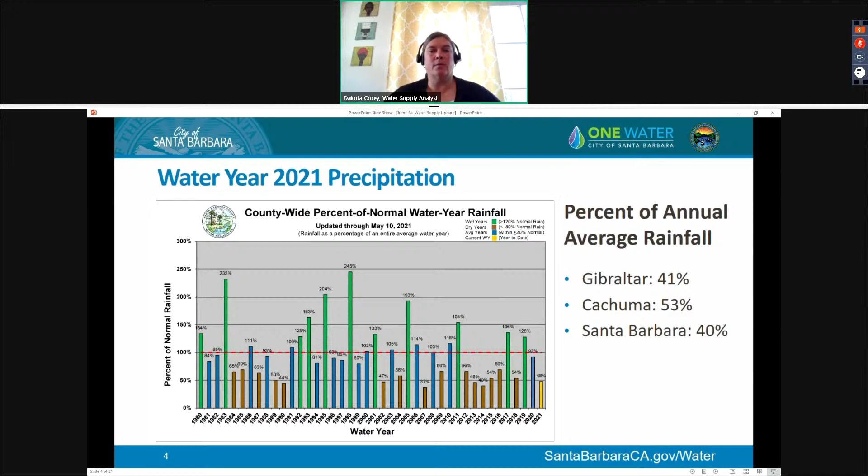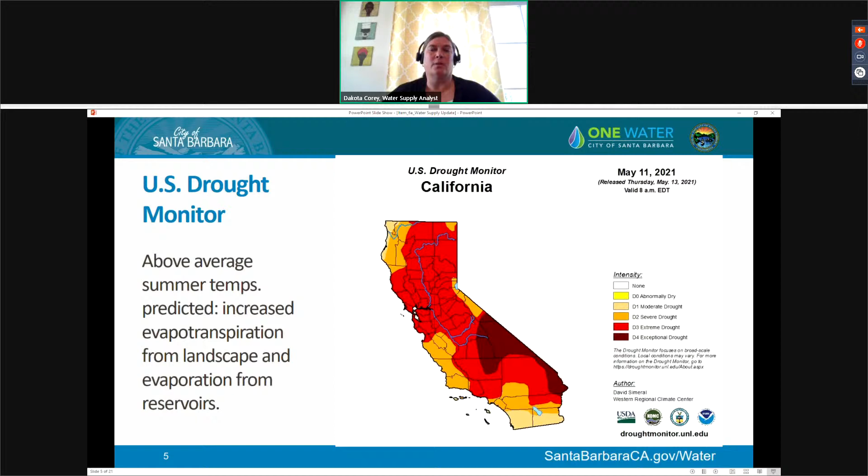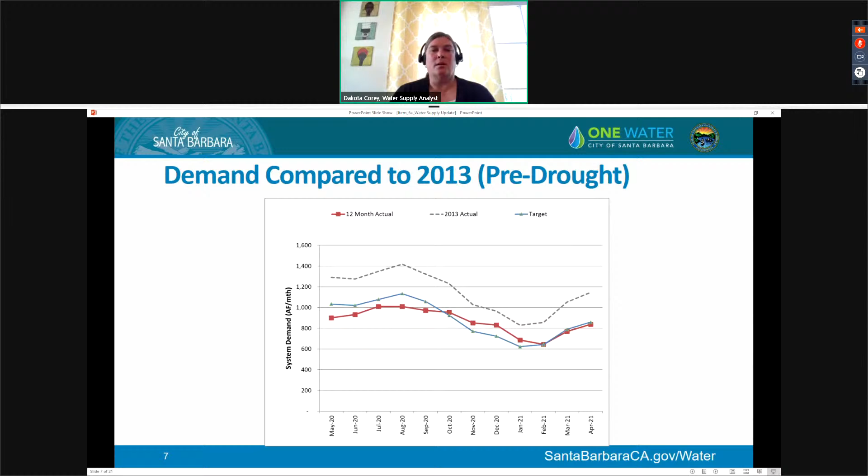So let's look at demand in the city. This is another graph that you've seen in the past, but just to orient ourselves, we look at 2013 actual data, that's the gray dashed line. You'll remember that we used 2013 as a benchmark, defined by the state as pre-drought conditions. On this graph, the blue line represents our target water demand, and the red line represents actual water demands. In this graph, we were expecting to see 20% less than 2013 actual demands. You can see the red line and the blue line are really tracking quite closely, so our community is on track with the demands we've projected through the water year.

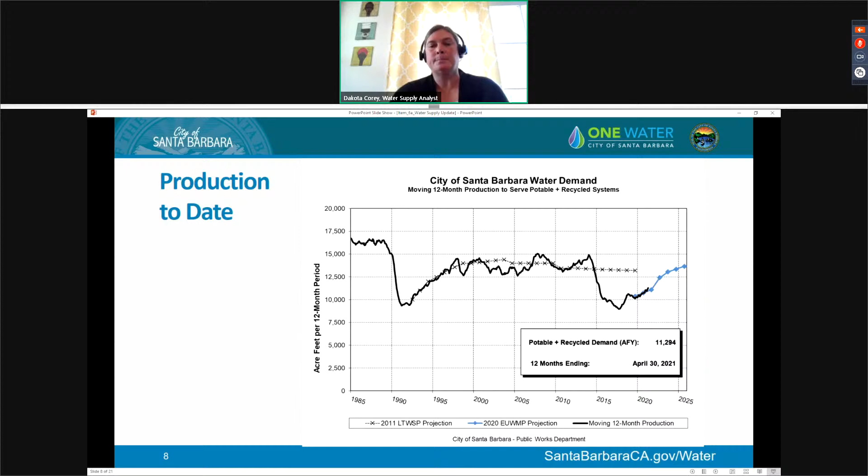Now let's look at each of our individual water supplies. We'll start with Gibraltar Reservoir, a reservoir on the Santa Ynez River that's owned and operated by the city. Currently, Gibraltar is basically empty. It has 554 acre feet of water stored, or about 12% of its capacity. We really saw negligible inflows into Gibraltar this year because we had so little rainfall, but we were able to utilize the water that had been stored in Gibraltar from the last rainy season. It last spilled in March 2020. For water year 21, we've actually been able to divert over 1,200 acre feet for use at the city, and that's been an important supply source. We'll see how that all comes together with our other supplies a little bit later in the presentation, but the short story is that using water in Gibraltar has allowed us to store more water in Lake Cachuma.

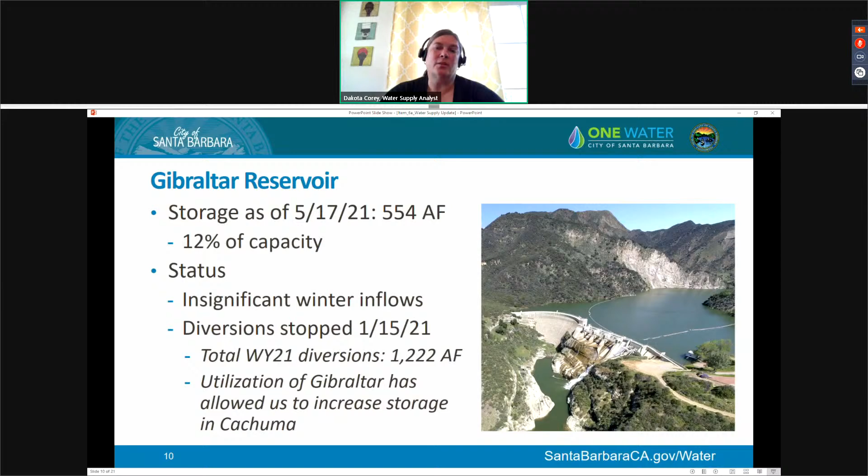Cachuma Reservoir is another large supply source of surface water for the city. It's a shared resource, so the city is one of several agencies that keep water stored in Lake Cachuma. Current capacity of Cachuma is about 60%, or a little over 114,000 acre feet. Of that water stored in Lake Cachuma, the city's stored supply is just under 25,000 acre feet, representing about 2.5 years of total demand for the city. I have a breakdown on the slide of how much is our current water year allocation.

Over 16,000 acre feet is carried over from previous years, and this is where management of our various water supplies gets really important. As we utilize other supplies available to us, we build up this carryover water in Lake Cachuma, which can be a really important resource and buffer as we head into dry years like now. Side note, the member units or other water agencies with water stored in Lake Cachuma will be requesting their water year 22 allocation by July 1st, so we'll probably have an update in the next couple of months.

Another source available to the city is the State Water Project. You've probably heard quite a bit about this source in the news. Across the state, water availability is really limited, and for this year the allocation on the State Water Project is only 5%. That ties with 2014 for the lowest ever State Water Project allocation. What that means for the city is our Table A amount, our potential to receive water from the State Water Project, is 3,300 acre feet of water. 5% of that is 165 acre feet. So we have very little water available to us from the State Water Project.

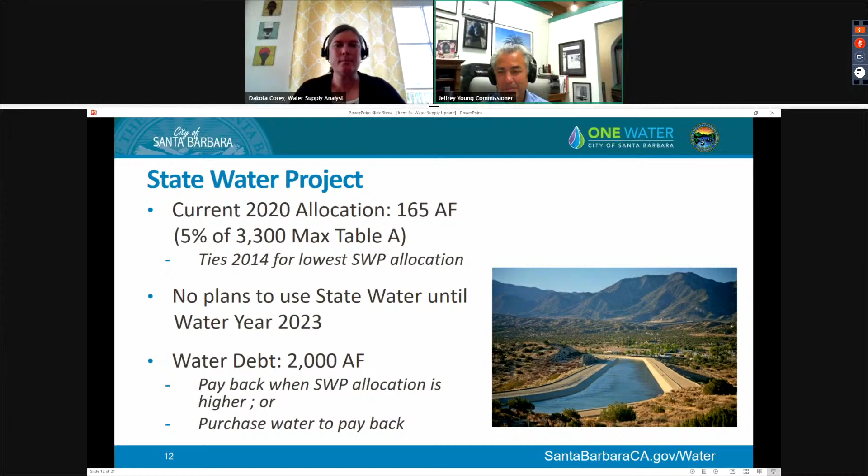Okay, so we can probably skip up to the groundwater slide. Thank you. So as you'll probably recall,

we utilized our groundwater resources quite a bit in the last drought. That's typically a drought supply for us. So we keep water in storage during wet years, and then we call on it during dry years when our surface water supplies are diminished.

Currently our groundwater basins look somewhat similar to what they did coming out of the last drought in the late 80s, early 90s. And since 2017, we have been resting our groundwater wells and basins to allow them to naturally recharge. We expect full recovery of the basins to take 5 to 10 years.

I did look at the graphs recently to see where we're at. In terms of storage in the Foothill Basin, we are seeing an upward trend of storage. And in terms of seawater intrusion in storage unit 1, we're seeing a downward trend of chlorides in the water. So we are seeing the groundwater basins recover in a positive direction. It's just going to take several years to fully get there.

I will mention that in the monthly Water Resources Managers Report, which is part of the Water Commission packet, those groundwater basin charts are included this time around, so you can see those.

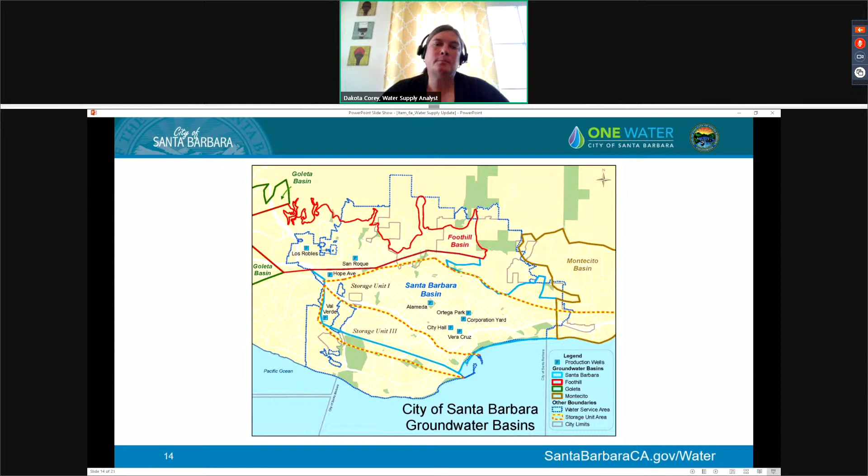Desalination is another important resource within the city's water supply portfolio. It's a critical part of our water supply, and it's played an extremely important role in drought recovery as we've been coming out of the last drought. And now as we're looking at potentially going into drought conditions in the future, it's allowing us to store more water in Lake Cachuma as we produce desalinated water and use it, which helps us with preparation for any future droughts. Next slide, please.

And finally, recycled water is another important supply that we have available to us. The recycled water plant has been operating and meeting customer demands. I anticipate that we'll have probably fairly high demands on that system this summer if we do have the higher temperatures that are being predicted. And fortunately, the plant is ready to go to meet those needs.

Recycled water plays a really important role because it allows us to offset what would be potable water used for irrigation with recycled water instead. And as part of the enhanced urban water management plan, we'll be kicking off an updated market assessment and cost benefit analysis, looking at opportunities to connect potentially new customers to the recycled water system this fall. So we'll be coming back with that to you later in the year. Next slide, please.

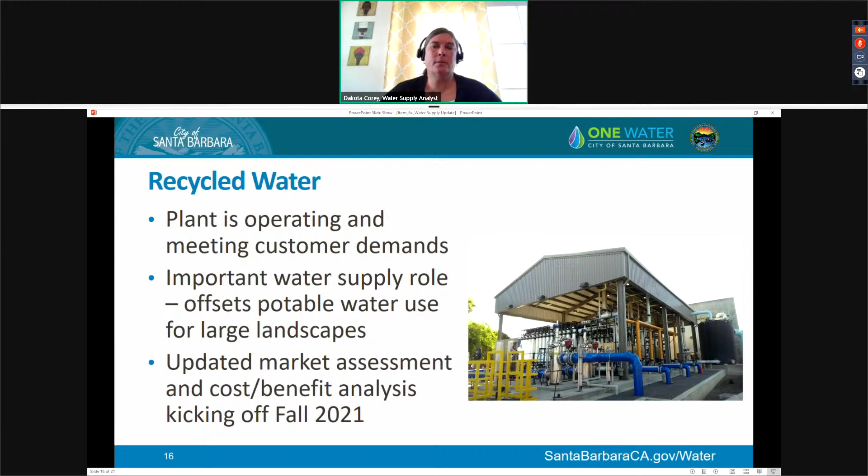Okay, so now we'll take a look at our water supply strategy. We can move on to the next slide. This is really where we put those demand slides that we looked at previously, and then our water supply slide together, and we look at the big picture.

So basically, we assume that we have dry years like we have had this winter, and that those dry years continue three years into the future.

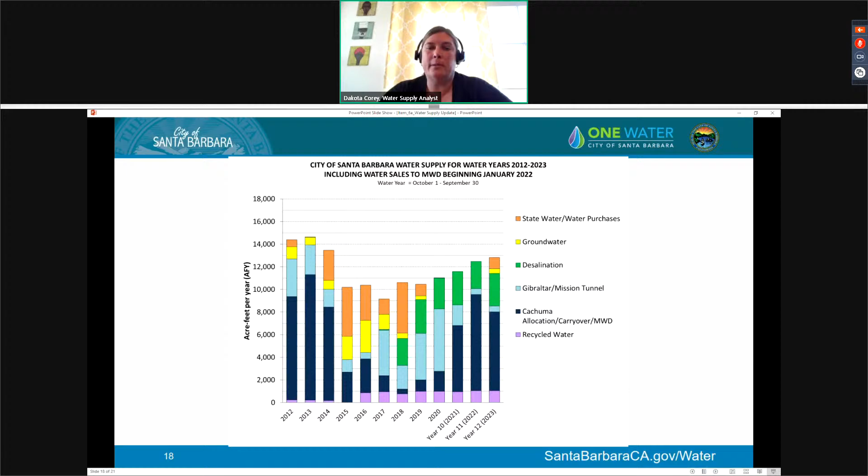So the big picture story here is that we have plenty of water to meet needs, even in dry conditions, out to the future. And that's really a result of prudent planning and our diverse water supply portfolio.

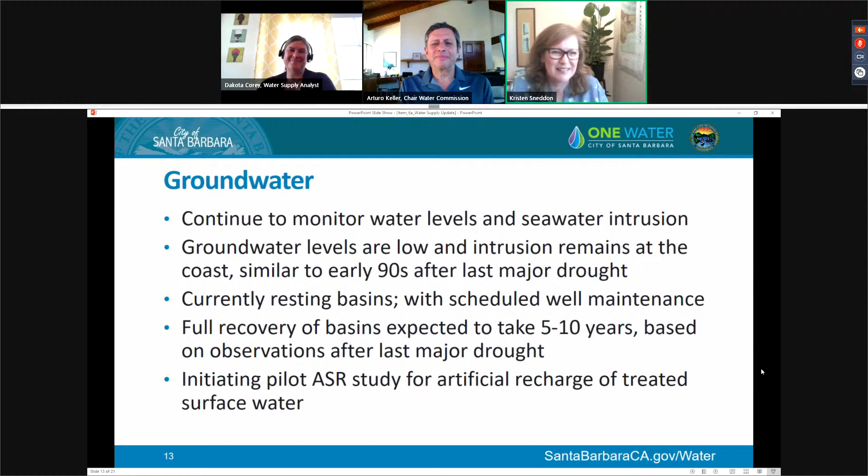So I love the new groundwater basin map. I think I've used that one in teaching too, so this new one is very very nice. Appreciate that one. And when we're talking about the groundwater injection, I'm glad we'll have a presentation on that.

A more full presentation. I can hear Edo McGowan's voice in my head coming to public comment and talking about the issues with groundwater injection. So it would be good for the public to understand that everything's being considered, and what's being considered.

And I just want to say, whenever we have this presentation, you make it so clear about how diversified our water portfolio is and how complicated with the exchanges - some of those exchanges are paper exchanges and some, you referenced, an in-lieu exchange - there's so much going on with all of these interactions. And then mentioning that it's cheaper to buy it in the wet year versus the dry year, I'm just so grateful for your work.

But then also I was just thinking about that we have this whole water commission that also is sort of checking everything and representing constituents and people and ratepayers. And then on top of that, this enhanced urban water management plan that reached out to the whole community.

I'm just, to see it all come together in this way with your planning, and we're right where we predicted. And even though we hear things in the news about drought and emergency, it's really gratifying every time you give this presentation to see how things play out. I just wanted to say thank you.

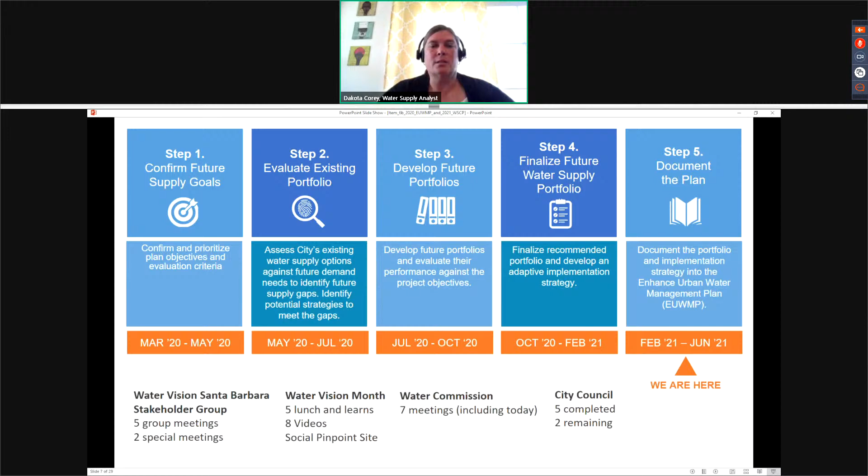Okay, so let's talk about urban water management plans. As I mentioned earlier, it's a state mandated plan that needs to be submitted to the California Department of Water Resources every 5 years, and there are specific analyses required to be within those plans.

One thing we must provide are water supply and demand projections with a 20-year planning horizon. Because our Enhanced Urban Water Management Plan is enhanced, or bigger than a typical urban water management plan, we actually went out 30 years in this planning process.

We also need to report on our water conservation targets. There was a Senate bill, SB X7-7, that required water agencies to reduce their water use by 20% by 2020. Now that we're preparing our 2020 urban water management plan, we're going to report on how we did in comparison to those targets. The good news is that we far exceeded them, and we'll talk about that in a little bit.

We're also going to be looking at our water supply in both normal and drought conditions, similar to what we talked about in the water supply update, but there are specific requirements for urban water management plans that I'll explain in a little while. This plan also includes a 5-year drought risk assessment, which is a new requirement, and finally the water shortage contingency plan, which outlines our different drought stages and the actions we can take to reduce demand if we have a water supply shortage.

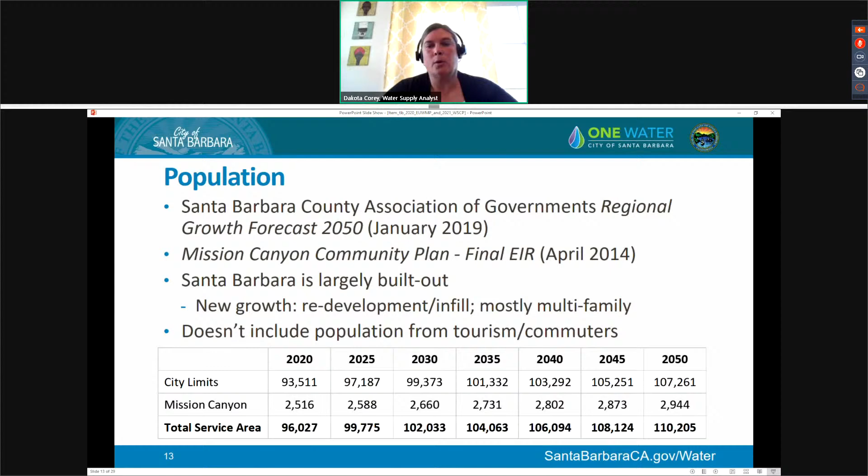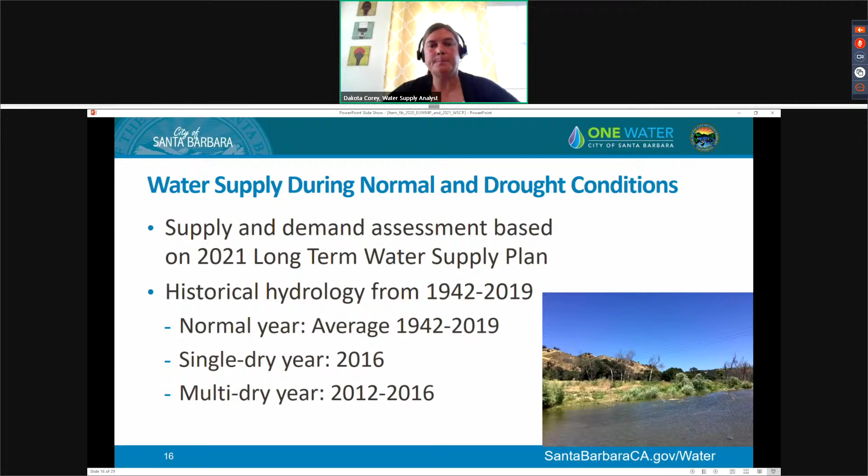Results of that assessment show what we've seen with our larger Enhanced Urban Water Management Plan analysis. In normal years, the city has sufficient supplies available, and we typically have excess supplies that we can store for future dry years. That's our carryover water in Cachuma.

That's letting our groundwater basins rest when we don't need them during normal years so that we can call upon them later. In a single dry year, because we have such a diverse water supply portfolio, we don't usually run into problems at all with supply and demand if we just see one dry year. We can easily meet those needs with carryover water stored in Cachuma, groundwater, and our various water supplies.

As we know from the work we've been doing on the Enhanced Urban Water Management Plan, it's really multiple dry years or consecutive extended drought where we start to see supply shortages at the city. In the multiple dry year analysis as defined in the Urban Water Management Plan, the results show that in year 5 of 5 dry years, we would see a water supply shortage of 20%, meaning that's when we would want to ask our customers to reduce demand through different water supply actions by 20% so that we can make sure we meet that demand.

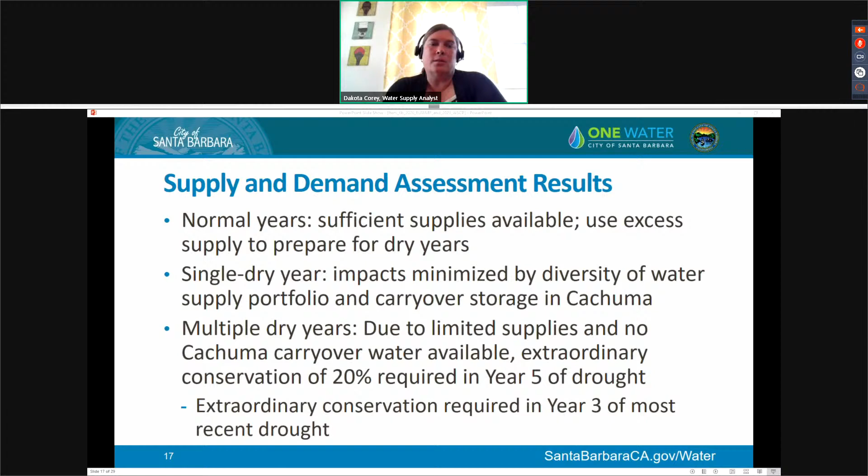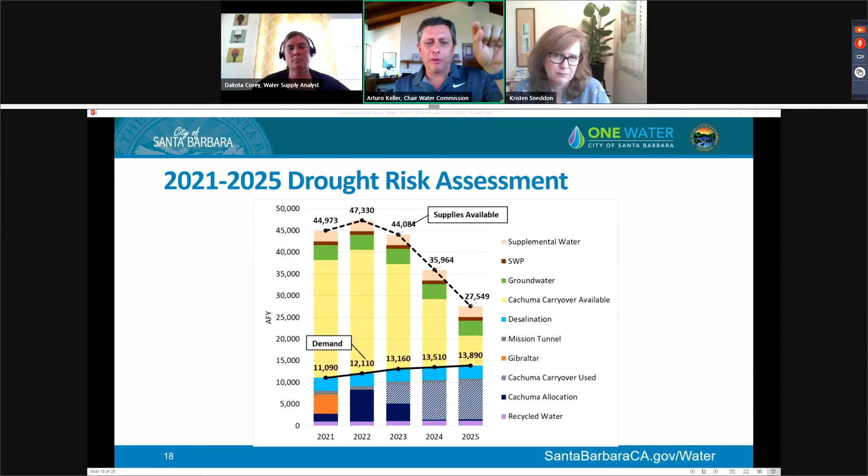Okay, let me give it a stab. I want to make sure I'm understanding your question correctly—if I may just try to clarify it a little. If we went ahead with 2 more years of drought, and the supplies available dipped below our demand, that's where things would get really complicated, right?

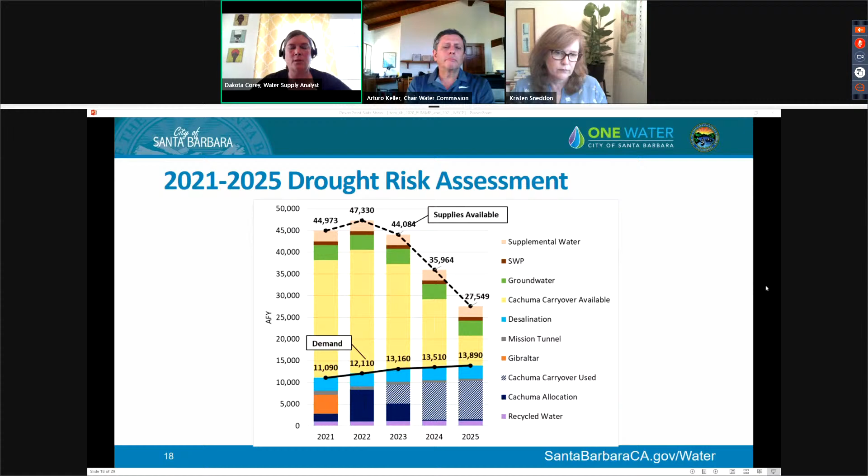So if we can skip ahead to that table, please, that has the 4 different drought shortages—maybe we need to edit that link. Is this one here? I'm thinking you're looking at these descriptions under water supply condition, and it talks about being linked to Cachuma entitlement, and that there's no other shortages, but it's not linked to the state water project—it's more specific to local conditions.

Okay, yeah, there you are. Thank you for that clarification, because we went through this slide and I somehow thought it was linked to our allocation from state water. Then you said how we're lessening our dependence on state water, diversifying the portfolio, so I wasn't making the connection. Thank you, that's really, really helpful.

And for comments, I agree with Commissioner Davis about emphasizing that 4th recommendation. I don't think it's really well understood by our ratepayers, or by our county representatives, how reliant we are, how all those moving pieces come together—and if you just pull one thread, the base of all of that is out of balance. I think this presentation describes it so well.

And part of that too, as I said before, with the enhanced urban water management plan, the process you went through—which I always say at council is the process to use—what you all did for this plan with the brown bag lunches and meeting with all the different stakeholders, with really a focus on equity, I can't emphasize enough how much I applaud that. It's not just the people who come and have the time in their day to come and make a lot of comments.

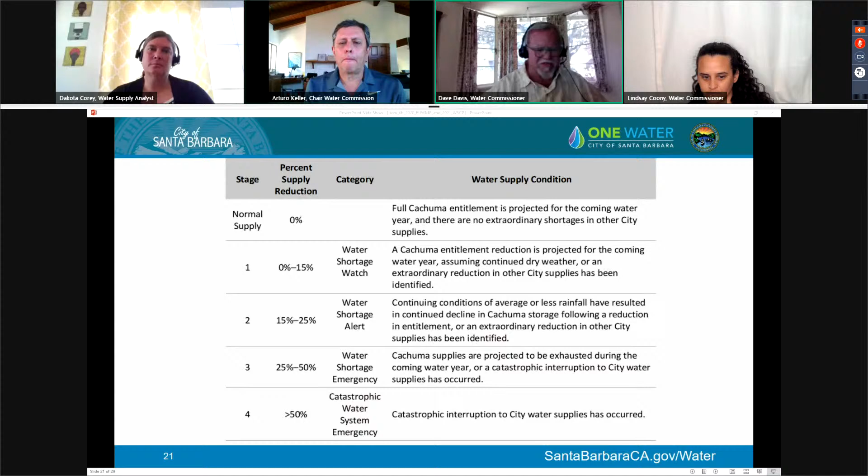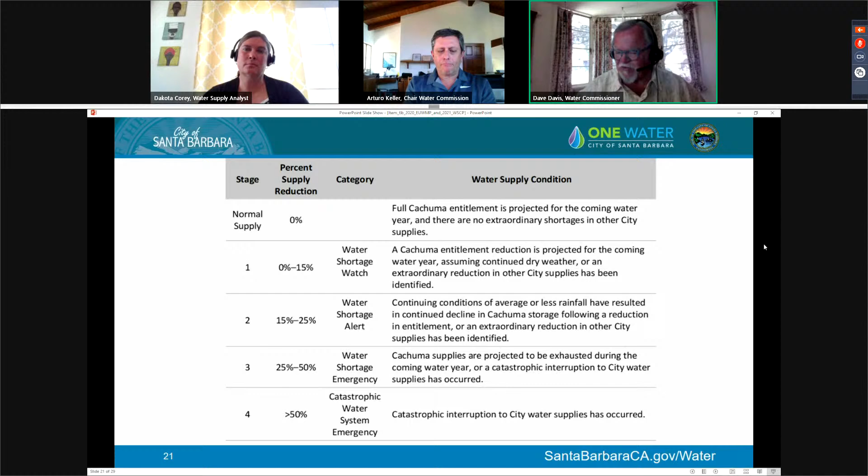Commissioner Davis: I did leave out one thing, mainly because I lost this battle in our last discussion. This is on the long-term water supply plan, page ES3, regarding the suggested water reserve thresholds for converting desal to standby. I had a good discussion with staff and consultants last time about the 180,000 acre feet, the third bullet there, and we discussed splitting the difference between 120 and 180.

My real comment is on this one point - the other two I feel strongly about, but this is a suggestion. As with our 2011 long-term water supply plan, by 2015 that was out the door because we were dealing with reality and adaptive management, and had to make changes. Under real conditions, I think the water supply manager will make the right calls, but to nudge them, I'd still like to see that be the mid-range at 150 rather than 180. Other than that, I'd be willing to make a motion when we're ready.

Okay, do we have any other questions or comments? No. Will we have a motion at this point? If we had no public comment, I will go to a motion.

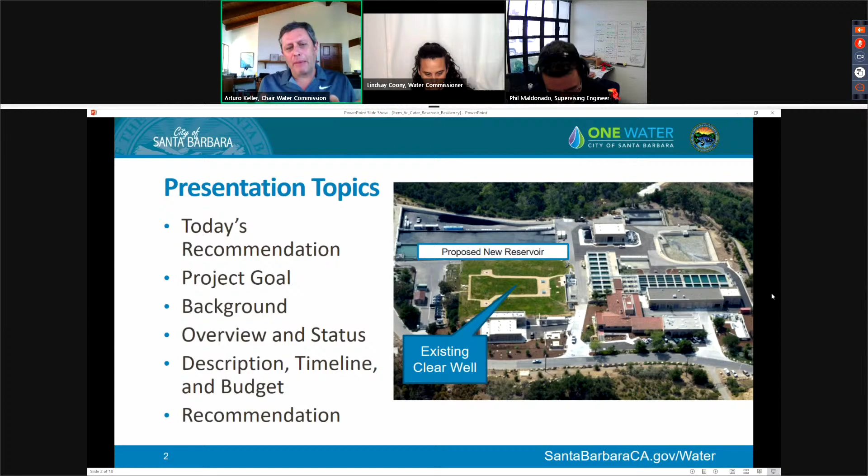So now we have Mr. Maldonado giving us the information on the contract for the design of the Cater finished water reservoir. Mr. Maldonado, you're a little bit under pressure. We do have some time constraints, but we don't want to rush too much, so please be as brief, but complete. Thank you, absolutely. Chair Keller, Commission members, Council Member Sneddon, good morning.

I will be as adaptable as I can be and move through this presentation. I am a supervising engineer with the city and manager for this project. I am here to present on the Cater Finished Water Reservoir Resiliency Project.

Next slide, please. Why are we presenting today? Staff is recommending authorization of a contract for design for this project. We're asking for Water Commission support of this action prior to taking this recommendation to council. We will provide background for the project along with an overview of the current status, description, timeline, budget, and the intended goals of this work.

Now, in the broadest terms, the goal of this project is to increase the overall resiliency of the city's water treatment system. This will be achieved by adding a new chlorine contact time reservoir to the treatment process.

The photo you see here is an aerial view of our Cater water treatment plant. In the center is a green field. This field covers the roof of our existing clear well, where the required chlorine contact time for disinfection is currently achieved as part of the treatment process before water is distributed to the city along with our regional partners, Montecito and Carpinteria.

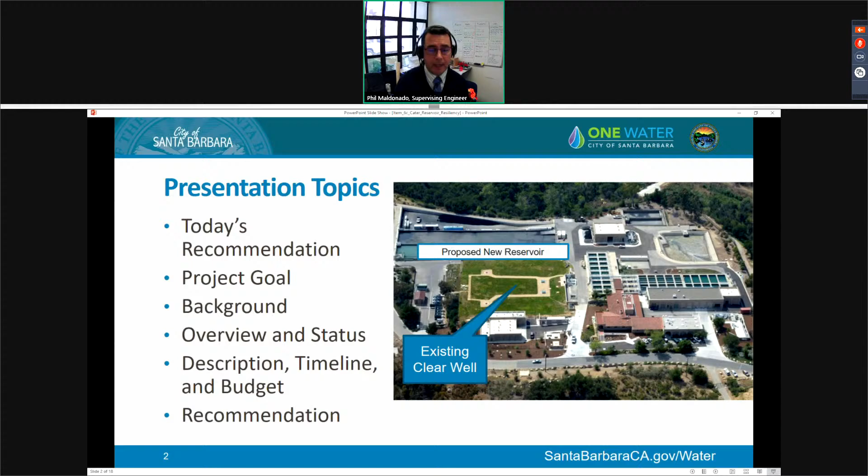For the design phase to move forward, staff recommends awarding a contract for design to Carollo Engineers in support of this project. Carollo was selected through a competitive request for proposals process. They were designated as the most qualified to deliver the project's design from a total of 3 firms who submitted proposals. As described in their proposal, Carollo has completed over 65 projects throughout Santa Barbara County, including multiple projects for the city of Santa Barbara.

Through their work, Carollo has developed extensive knowledge of our city. Specific to this site, they designed the advanced treatment project at Cater and have recently completed 3 of the 4 evaluations used to support this project scope. Next slide, please.

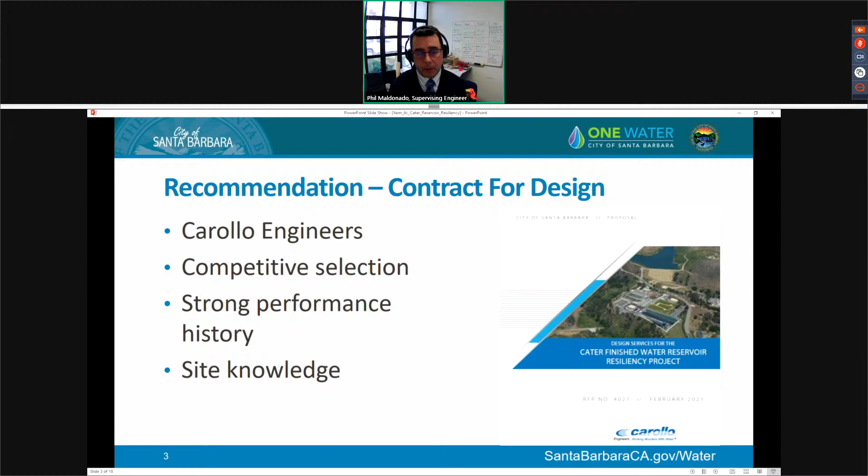As initially mentioned, the primary goal of this work is increased resiliency. But how is resiliency defined for this project? Resiliency will be achieved in multiple ways.

First is by increasing the amount of water storage available at the treatment plant. This additional storage will allow for greater operational flexibility by allowing the existing clear well to be bypassed for extended periods of time. The design scope includes the addition of an approximate 2.5 million gallon reservoir.

Second is by extending the time available for chlorine contact to occur in the treated water. The normal operating state of the new reservoir will be to provide the needed chlorine contact time required for disinfection compliance. This will leave the full capacity of the existing clear well as a treatment buffer if there is ever a need.

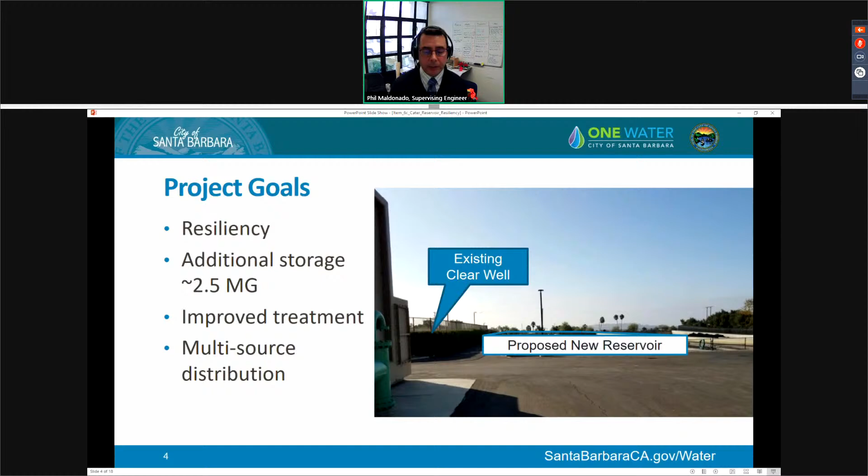Finally, piping modifications will allow blending additional city supply sources like desalinated water conveyed through the distribution system. Combining these sources at Cater expands the reach of these additional sources throughout the city and the region, maintaining the treatment plant as the distribution hub for the city and our regional partners. Next slide, please.

In the next few slides, we will review the project background. This will include the existing clear well and how it functions in the system. Please note, the image on this slide depicts the existing clear well and the basic elements of its configuration.

We will also review the assessments that have been conducted, the needs these assessments were developed to address, and the recommendations provided, an expanded description of the benefits that will be realized by adding storage capacity, and how the proposed design will be centered on maintaining regulatory compliance. Next slide, please.

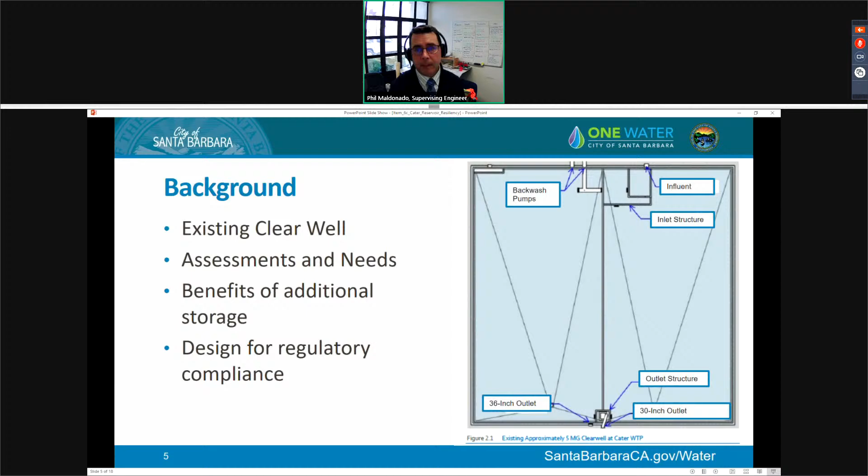Constructed in 1962, the existing clear well has an operating storage volume of approximately 5 million gallons. The existing clear well sufficiently achieves all regulatory measures required of the treatment process. With that said, there are operational limitations that impact the long-term viability of this facility if not addressed.

First, with only one reservoir, there are limited operational scenarios that allow for the needed periodic cleaning and inspection of the reservoir. This constraint also greatly limits the ability to replace or repair equipment internal to the reservoir. As this reservoir ages, the need for increased maintenance becomes greater.

This design will ensure complete treatment for all flow conditions through the new reservoir. The design will also include an in-depth seismic and structural assessment of the existing clear well that will inform staff on any current deficiencies that may impact the long-term needs of the facility.

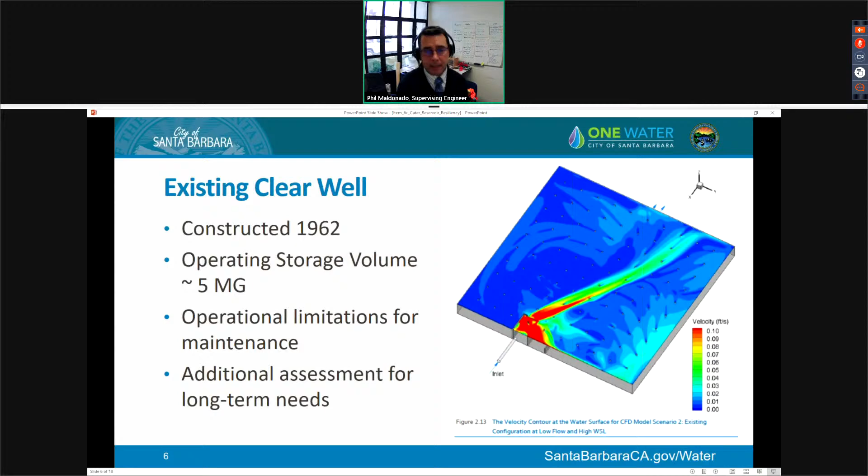The city conducted 4 separate assessments to develop this scope of work. First, the Cater Yard Piping Modifications Technical Memorandum was completed in October 2018. This technical memo analyzed piping modifications and routing options to blend additional city water supply sources conveyed to Cater. These modifications will improve overall supply resiliency by expanding the reach of these additional sources throughout the city and the region.

Second, the Cater Clearwell Structural Analysis Technical Memo was completed in January 2019. This memo assessed the structural capacity of the existing clear well to accept modifications to the interior that would benefit the treatment process. Third, the Cater Clearwell Chlorine Contact Time Evaluation Technical Memo, completed in February 2019, evaluated the requirements of the existing clear well to achieve disinfection permit compliance. And finally, the Cater Chlorine Contact Basin Feasibility Study Technical Memo, completed in June 2020, analyzed the feasibility of 4 possible locations for a new reservoir at the Cater Water Treatment Plant.

Completing these assessments enabled city staff to develop the recommended scope of work for this project.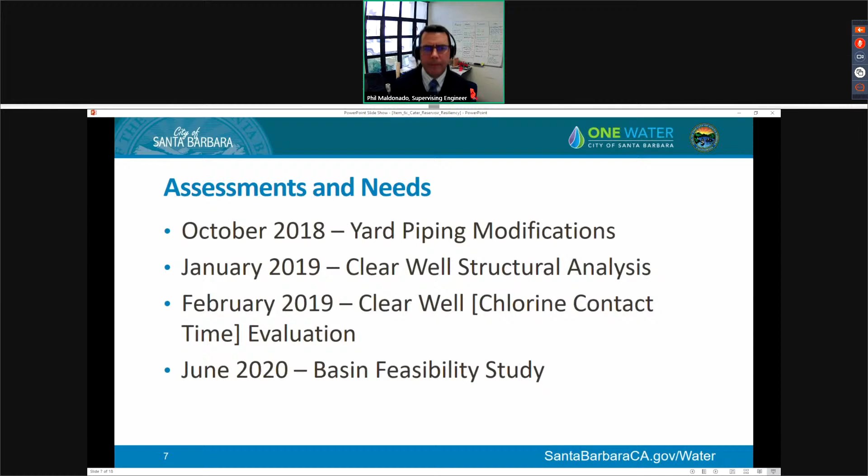Additionally, the risk of operating at this diminished capacity limits how long access to one side of the reservoir is available. For the majority of the year, the entire reservoir must remain in service, and this limited access represents a significant liability if a situation emerged that required immediate response.

The new reservoir will allow for bypassing the existing clear well for the full range of flows through Cater. This will allow for complete access to the existing clear well for an extended period of time if needed, both for periodic maintenance or more extensive repairs as they are identified.

The new reservoir will be designed to achieve the required chlorine contact time for the full range of flows. It should be noted that a properly designed reservoir can accomplish this in approximately half the volume of the existing clear well. The ability to bypass and maintain complete treatment through the new reservoir will expand the range of operating conditions available to staff. This expanded operational capability greatly increases the long-term resiliency of the existing clear well, as well as the overall distribution system for the city and our regional partners.

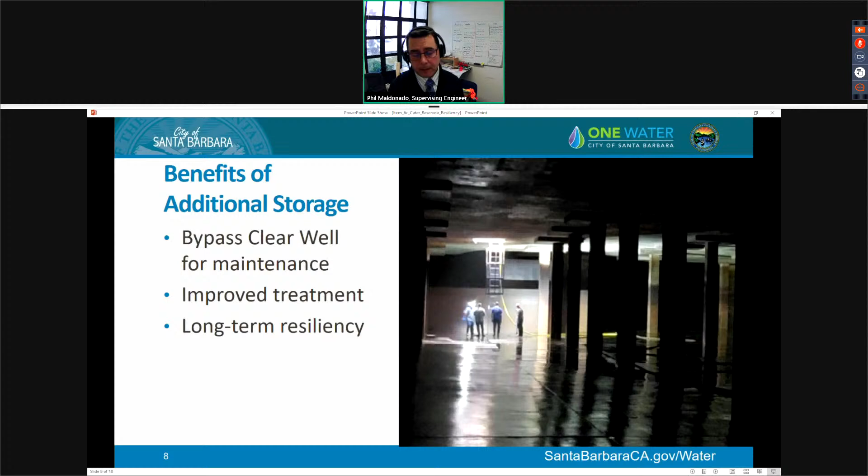This slide shows another view from the interior of the existing clear well. As shown in this photo, the size of the interior equipment requires additional time to both maintain and replace as needed. The proper functioning of this equipment is key to the treatment that this facility provides for regulatory compliance.

As well as the ability to store and move water where it is needed throughout the city and into the South Coast conduit for our regional partners. The proposed new reservoir is intended to fully address all regulatory compliance needs of the treatment process.

These include operational flexibility that will allow both reservoirs to be maintained independently, supporting system resiliency for the life of both assets. The new reservoir will include elements that allow it to treat water for regulatory disinfection compliance using half the volume of the existing reservoir. The improved hydraulics of the new reservoir will optimize treatment to ensure required chlorine contact time is achieved. With the new reservoir in place, the existing clear well can be assessed in greater detail and more extensive maintenance can be performed in the future.

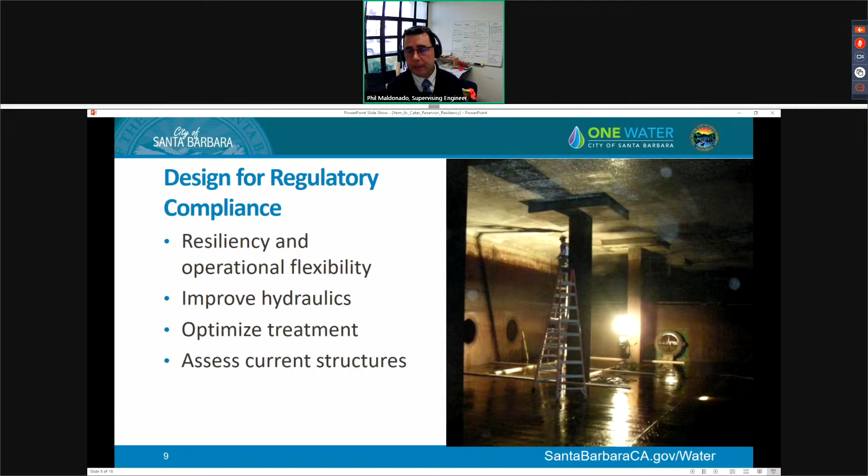As mentioned previously, the scope of work was developed using multiple assessments and drawing from the operational knowledge and experience of current staff. The primary scope objective is to construct a new reservoir adjacent to the existing clear well, allowing the existing clear well to be used for storage and supply balancing. Adding this new infrastructure will require connective piping and modifications to the inlet and outlet structures of the existing clear well. Carollo's proposal included an effective design approach centered on industry-leading modeling and analysis tools, combined with an extended history of implementing similar projects, making Carollo the best firm for this work. Staff are ready to proceed with the design effort, building upon the preliminary work already completed.

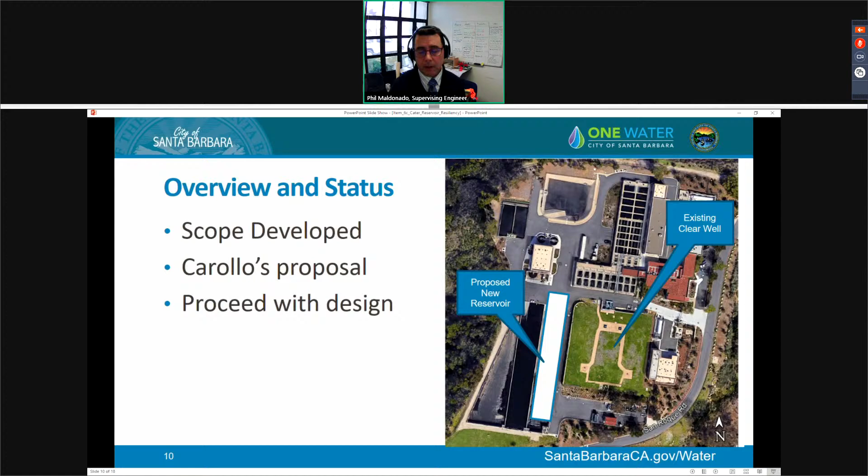So what is included in this design? In its simplest form, it is the design of an optimized chlorine contact reservoir. This reservoir will meet full disinfection compliance at half the volume of the existing clear well.

The proposed new reservoir will be designed to bypass the existing clear well when needed. Additionally, the design will include the operational ability to bypass the new reservoir using the existing clear well as needed for future maintenance. The normal operation of the new reservoir will be to provide the needed chlorine contact time for the process. This will leave the full volume of the existing clear well for receiving conveyed supplies from the distribution system and storing additional volume when needed, all while continuing to function as the distribution hub for much of the South Coast. To receive these conveyed supplies, the inlet and outlet structures of the existing clear well will be modified. There will also be connective piping that will allow for these different modes of operation.

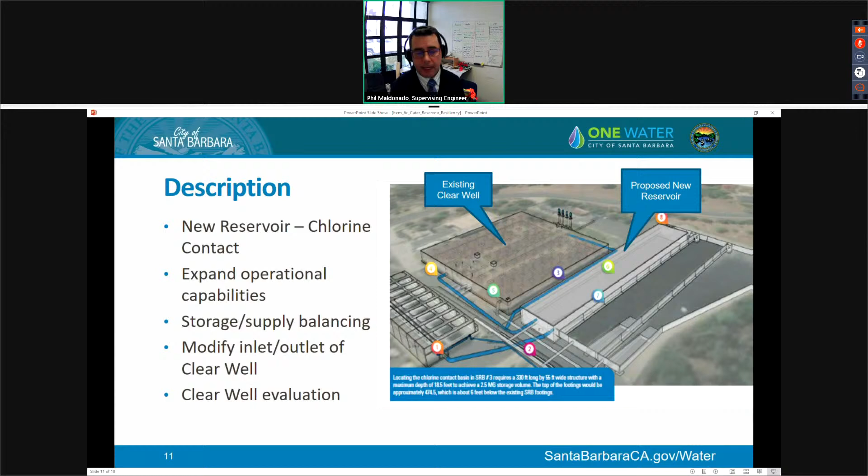Alternatively, for clean water loans, the agreement coordination does not begin until after the loan is awarded, which can add up to a full year before construction is allowed to start.

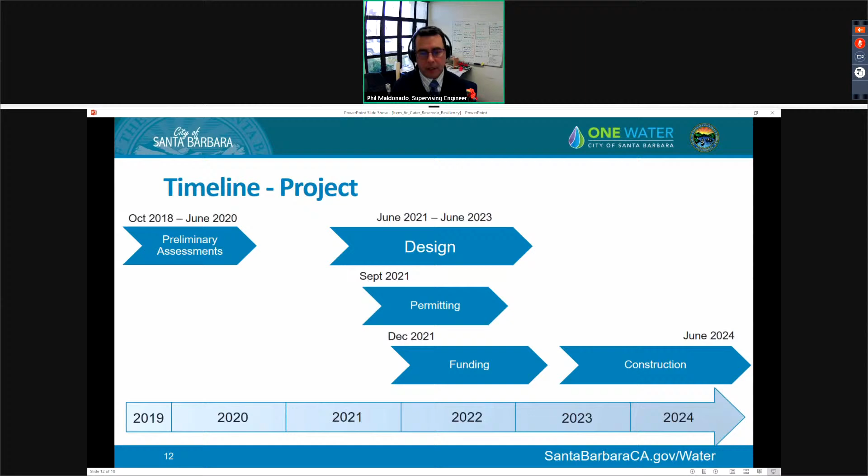For this project, staff have estimated a total cost of $10.6 million. The entirety of these costs are anticipated to be covered by the Drinking Water SRF loan. The interest rates for these loans are extremely low. Additionally, the state has more funding available for Drinking Water SRF projects, making the process a bit less competitive. There is a one-year application process, but as stated earlier, this process will begin early in design development. Taking advantage of these loans for projects like this helps reduce the rate burden and allows staff to match the timing of cost with the realized benefits.

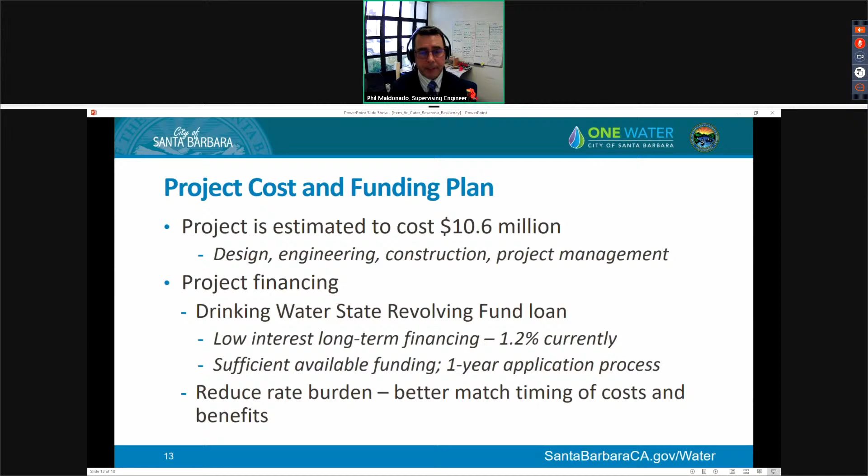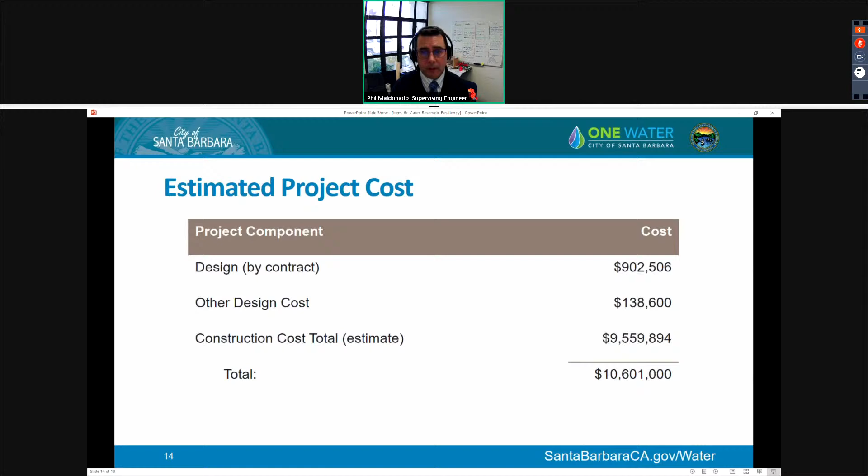As previously mentioned, the design effort will include an in-depth seismic and structural assessment of the existing clear well. During the design, staff will review the results of the assessment to determine needs that can be addressed with the current design effort. This assessment will provide staff with recommended strategies to mitigate structural weaknesses that may be identified. Staff have anticipated the possibility of needed work developing from these strategies and have budgeted accordingly for the second phase of both design and construction.

The budgetary estimate for this work is $7.7 million. If needed, the full project cost could increase to as much as $18.3 million. This second phase of work would be added to the Drinking Water State Revolving Fund loan.

As a final note, I should be clear: the majority of this work, other than the connective piping at the site, will be cost shared with our regional partners by the terms of our joint powers agreement. Our partners are aware of and supportive of this work and the lead role the city is taking.

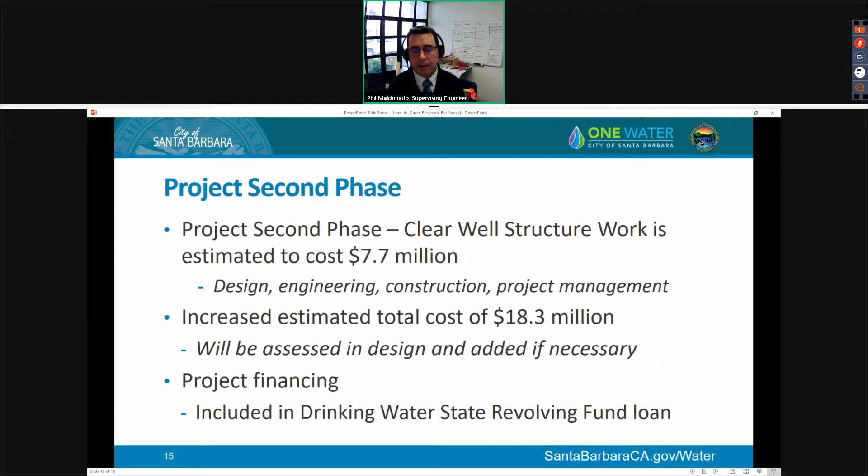And with that, I would like to close as I began. Staff is requesting that Water Commission support the authorization of this contract and allow staff to continue this contract for design with Carollo Engineers to City Council for final authorization. As we have discussed, this project is necessary for the long-term sustainability and resiliency of this facility and the broader distribution system. Thank you very much for your time, and I would like to address any questions you may have, as I know I did move through that fairly quickly.

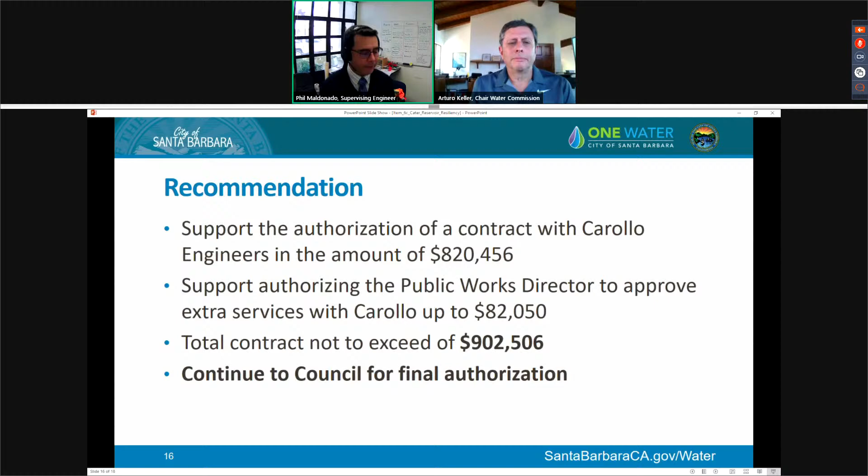Thank you, Mr. Maldonado. Thank you for moving it through fairly quickly, but it's a clear presentation. Quick question, what's the minimum contact time that they're aiming for?

Oh, actually, I do not know off the top of my head. Yeah, it's buried in there, and as I am not a water operator in charge of operating the facility, I could get that number to you, but I don't have it with me. Okay, thank you very much. Water Commissioner, Commissioner Cooney.

This might be another you're going to get the answer to us, but I had another question about the chlorine contact time. You said it was going to be increased from the previous storage facility, and I was wondering, at some point, what the benefit versus the cost of the increased chlorine contact time is. How do you choose the chlorine contact time you're really aiming for? There's obviously a minimum, and I'm sure at some point it continues to get better. Is there a point where it's diminishing returns, where you're paying more for not as much benefit? How do we look at that? But again, feel free to get back to me later.

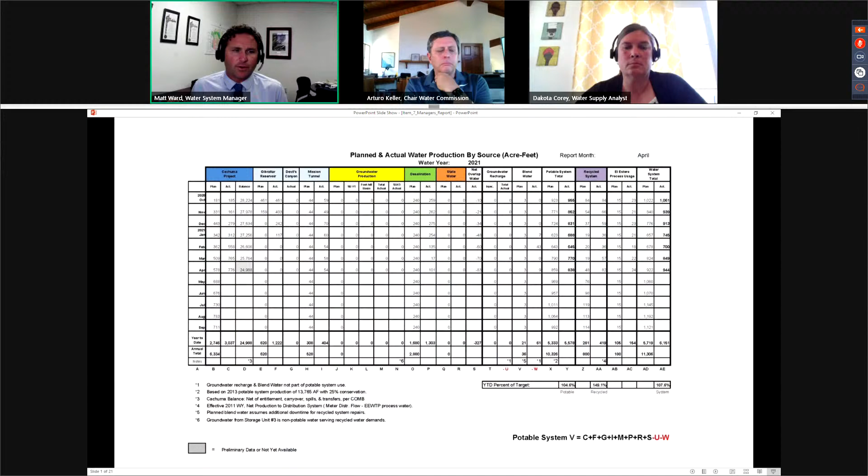Thank you. And I'll add that there is a little bit of planned use for some of the remaining supply in Gibraltar to perform maintenance on the hydroelectric plant. That tunnel intrusion water does contribute a significant amount of water to Lauro Reservoir and allows us to operate that plant with sometimes a minimal draw on Gibraltar. So it does allow us to maximize the use of the hydro plant.

And with that, is there any other questions? Any other questions or comments?